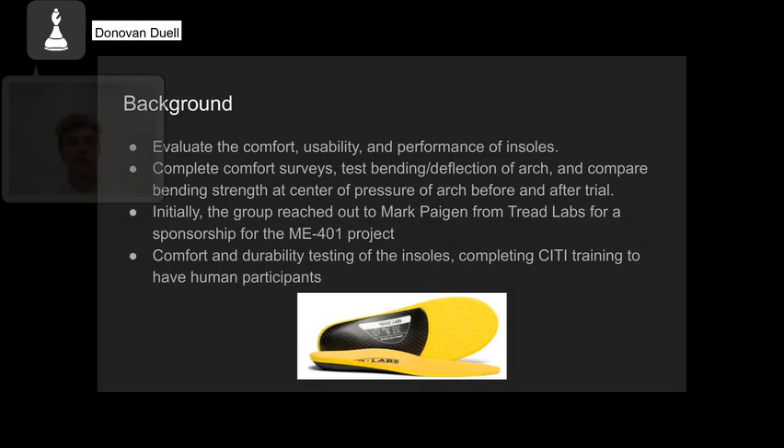To provide some background for our project, we are testing TreadLabs insoles, which were supplied by Mark Paigen and our partners at TreadLabs, who offered to sponsor our ME 401 project. This project will evaluate the comfort, usability, and performance of the insoles, where we talk about a study completed with human participants and also some mechanical testing on the insoles, which we'll explain later in the slides.

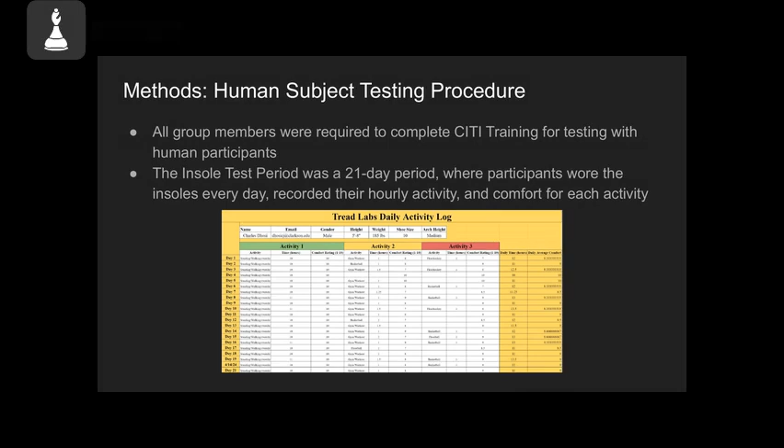For the human subject comfort testing portion of our project, all group members were required to complete training for testing with human participants. These participants would undergo a 21-day trial period where they would wear the carbon fiber insoles every day. They would record their activities, whether going to the gym, playing sports, or simply walking around, and rate the comfort 1 through 10 for each activity.

So we had two main mechanical test procedures. First was looking at the insole arch height, or the deflection over the period of use. We marked a point on the inside top surface of each insole and then measured the height of the arch from a flat surface using a set of vernier calipers. Care was given to make sure the calipers were perfectly perpendicular to that flat surface to ensure repeatable results.

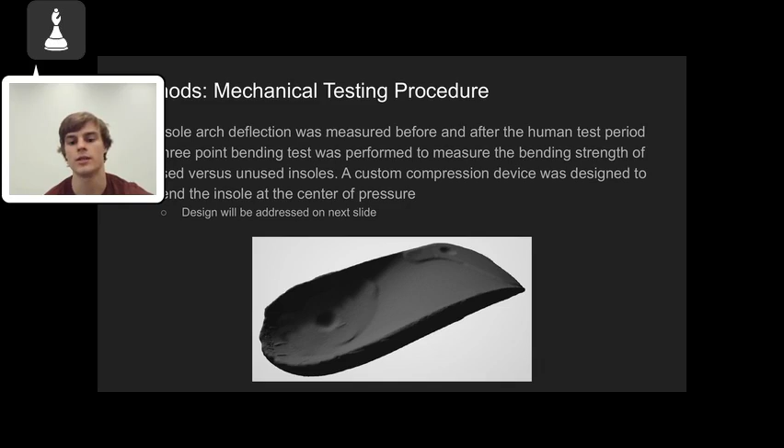The other aspect was a 3-point bending test, where we used a custom compression device to compress or bend the insoles through the center of pressure. Here at the bottom of the slide, you can see a 3D scan that was used to make this compression device. We're going to talk about that on the next slide.

Using this, we were able to connect it into the materials tester and then deflect each of the insoles to a specific height or deflection, and then measure the force required to do this.

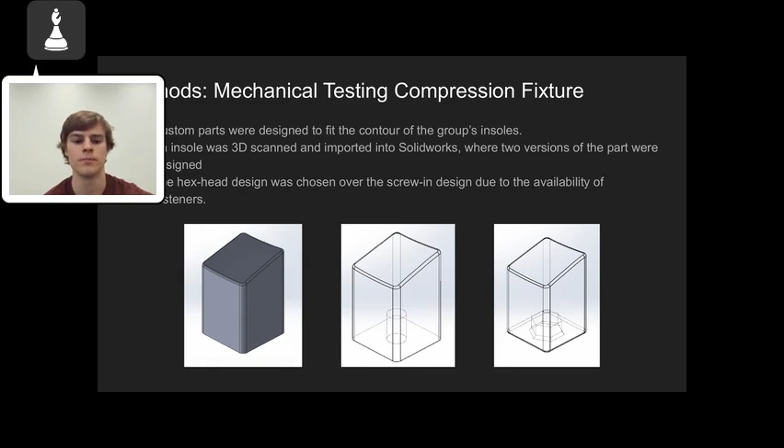These were 3D printed using 100% density resin, which was very solid, using a Form 3 SLA 3D printer in the makerspace.

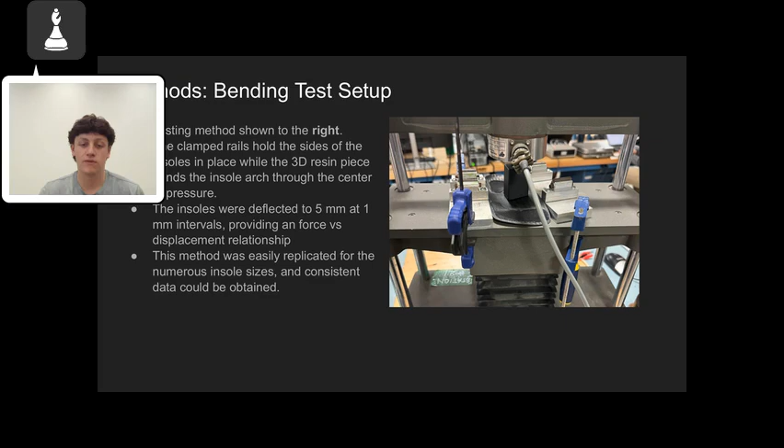Now for our bend test setup — on the right you can see the setup we used. We had two rails that we found in the lab, which we clamped down to the load frame to make sure the insole couldn't move laterally. Then we pressed down on the center of pressure with our 3D printed resin piece, and from there we were able to test the deflection from 1 to 5 millimeters.

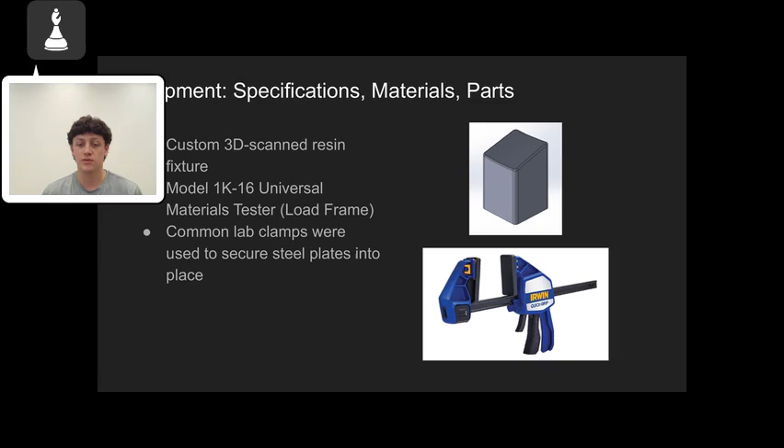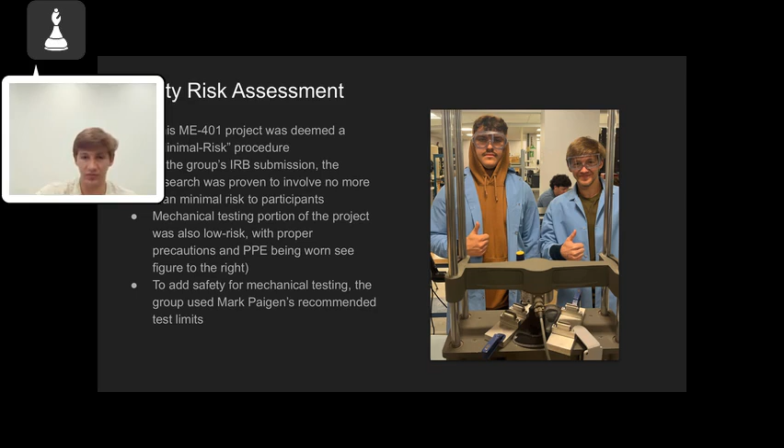Carbon fiber is a pretty strong material. But the only thing we did notice is that human error was a major factor. The vernier calipers are accurate, but they weren't very accurate for our purpose. Maybe we could have taken a better crack at it with a different method. But overall, the arch heights did not change that much over the 3-week period.

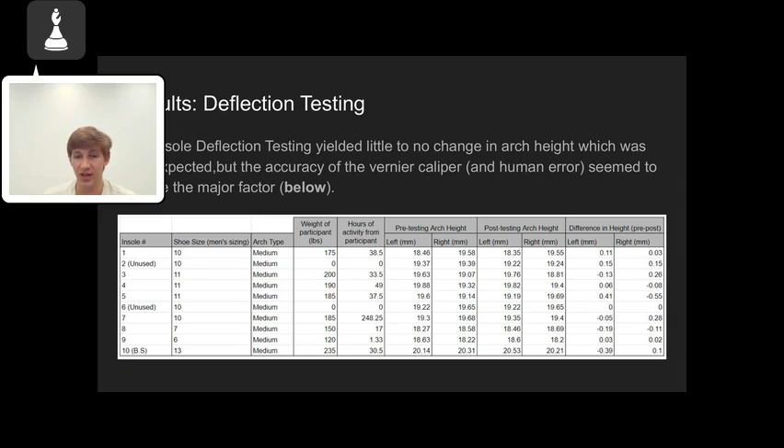Along with the deflection testing, we also performed bending testing on both sides of the insoles. We noticed there was a variation in the different sizes. For example, the smaller size deflected more in proportion to its height, and therefore required more force to bend it. There's also a little variation between the used and unused insoles, as we can see on the next slide.

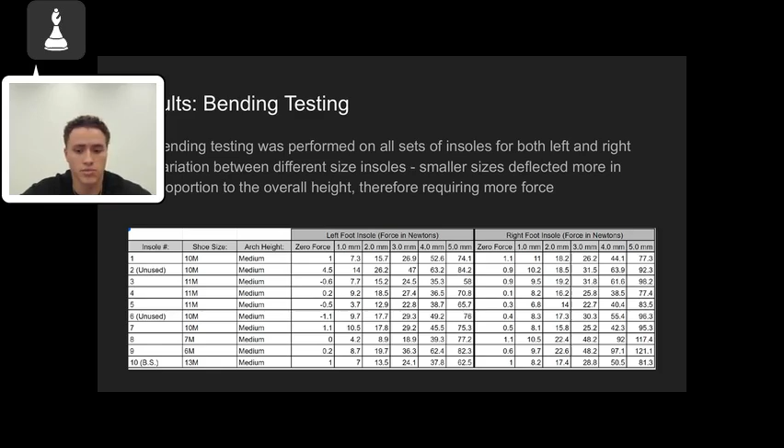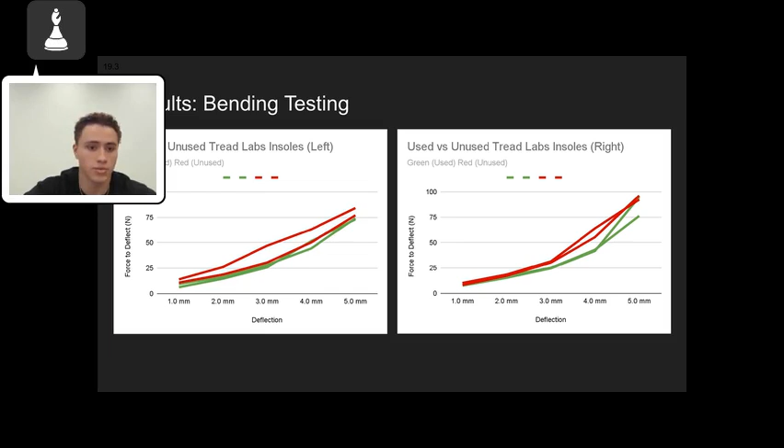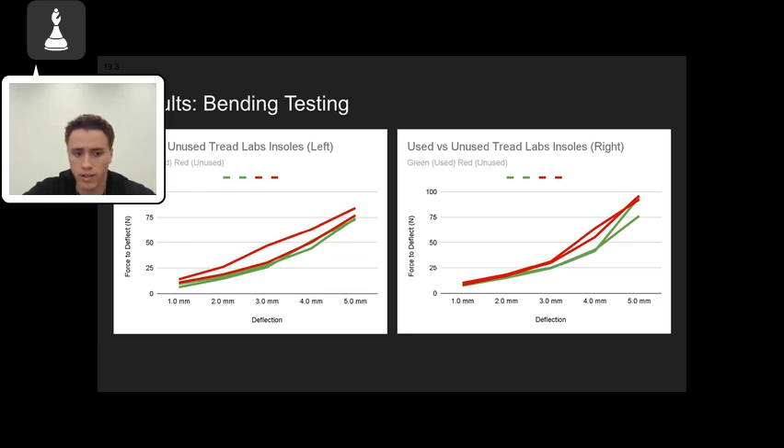Both these graphs demonstrate the different force required for the unused and used insoles, on the left with the left insole and right with the right. The green is what it is when it was used. Therefore, we can see it takes less force to deflect because they're already worn a little bit, and the red requires more force to deflect these insoles.

The group found that the male participants enjoyed the insoles throughout the comfort study. It should be noted that the insoles do have a 1 to 2 week break-in period, which took up a large part of our study, unfortunately.

Overall, there was some mild discomfort for almost all members in the beginning. However, for our male members, this did pan out over time and became comfortable, or even preferred by many of our participants. However, our female participants were not satisfied with the comfort of the insoles and would not want to continue wearing them.

They experienced discomfort when wearing them during the study. This discomfort could be attributed to mismatching the proper arch height.

All of the insoles that we used in the study were a medium arch height insole, where there's a high, medium, and low arch height available from Tread Labs. So it's possible that each participant's foot didn't fit with the medium arch height, and having different break-in periods per user, just depending on individual preferences and use time, could be attributed to the discomfort over the entire study.

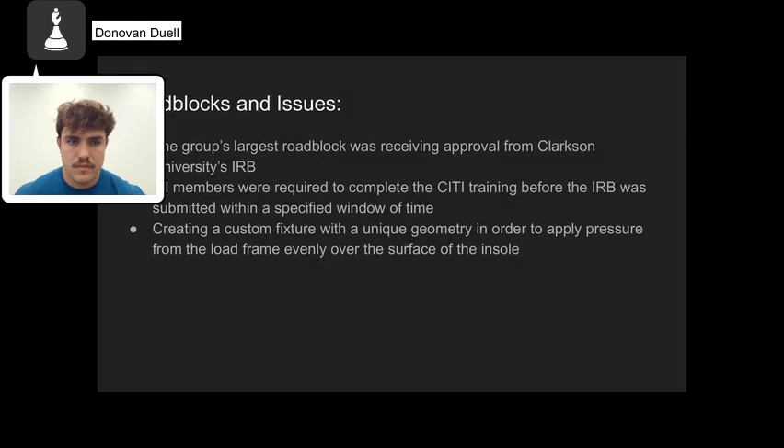The major roadblocks for our group, the main roadblock, was submitting the IRB proposal to our institutional review board. That took a lot of time and reviewing. It took away from the length of our study, since this study had to be conducted within the bounds of one semester. We would have liked our trial to run for a little bit longer.

But getting the IRB approved and being able to actually have human participants within our study took a lot more time in the semester than we would have liked. We also had to complete some training, which took some time to get through the red tape of getting it done, approved, and checked off before we could get our IRB approved.

Another roadblock we faced was trying to find a way to best distribute the pressure from the load frame onto the surface of the insole, since the insoles have a unique custom geometry to each of them, and there aren't really any linear or flat surfaces that we could apply the pressure to.

We needed to make a fixture and make it fit nicely around the center of pressure of each of the insoles. That took a lot of time to make it fit and work for all the insoles, since we also had insoles of different sizes. So making that geometry applicable to all the sizes was also a roadblock that we faced.

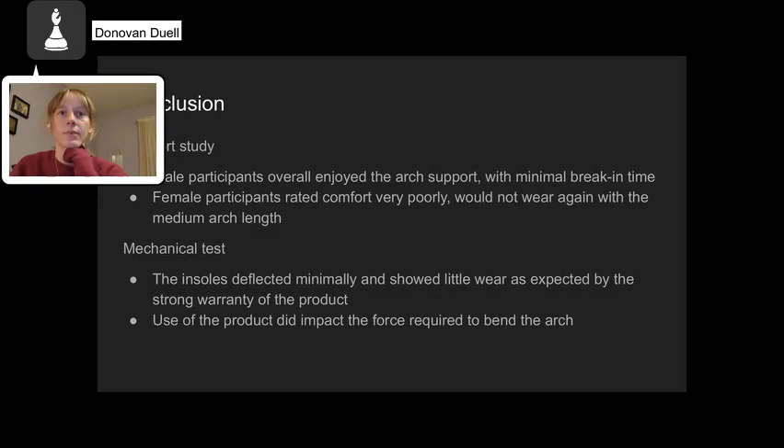Overall, the results of the comfort study over the duration of the semester can be summarized as follows. Male participants were able to enjoy the arch support with minimal break-in time and minimal discomfort. However, the female participants recorded very low comfort ratings and would not wear the insoles again.

The results of the mechanical testing show that the insoles themselves had minimal deflection and showed minimal wear over the test period. These results were expected because of the strong warranty of the product. However, the testing did prove that the use of the product definitely impacts the force required to bend the arch.

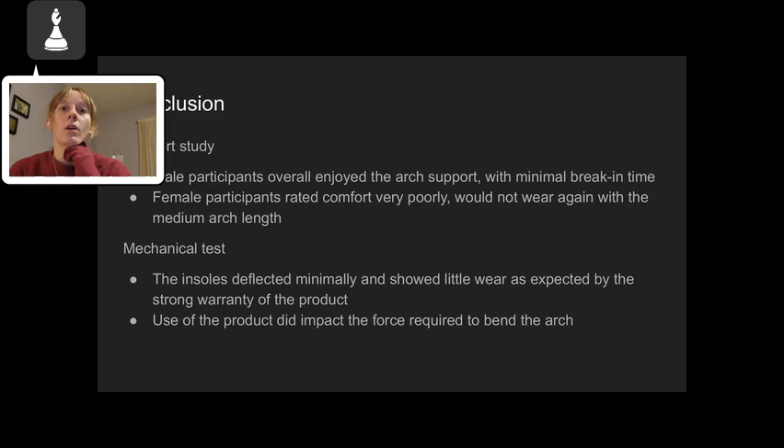So overall, we would definitely recommend doing a larger test period in the future to gain better results, specifically within the comfort study portion of the testing. Our results met our base hypothesis that insoles would show very little wear over the short time, but bending force did vary depending on different factors such as weight and shoe size.